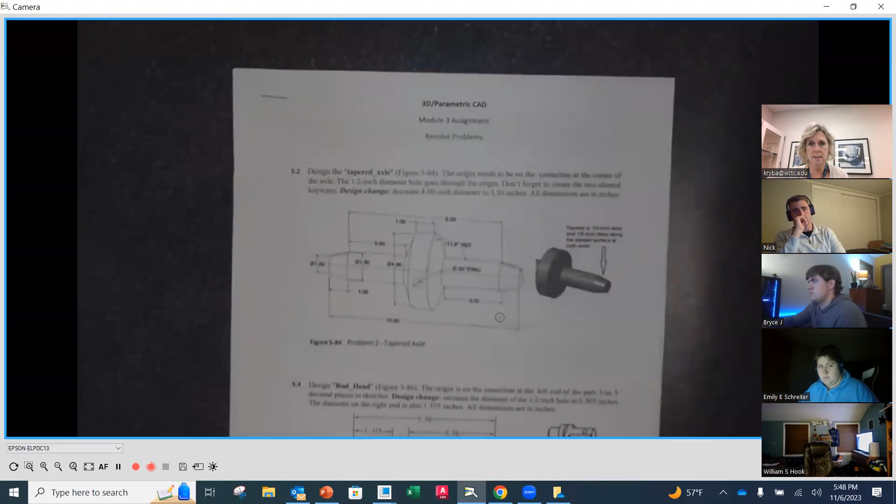I do have it printed out and I'm going to be putting it underneath, but you'll notice that each one of our models is worth 10 points like it normally is. And then you're going to be submitting the screenshots again, like you normally have been. So let's take a peek underneath and look at the items that we have assigned here.

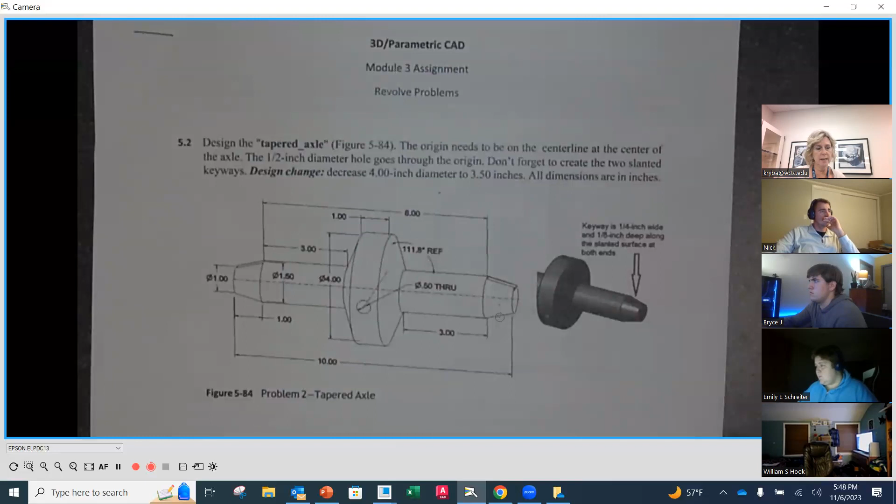So the first problem that we have here is called the tapered axle. You're going to notice the center line going through here. In this case, they want you to put the origin at the center line of this axle. So what that means is down the middle right here is where that front plane is going to be.

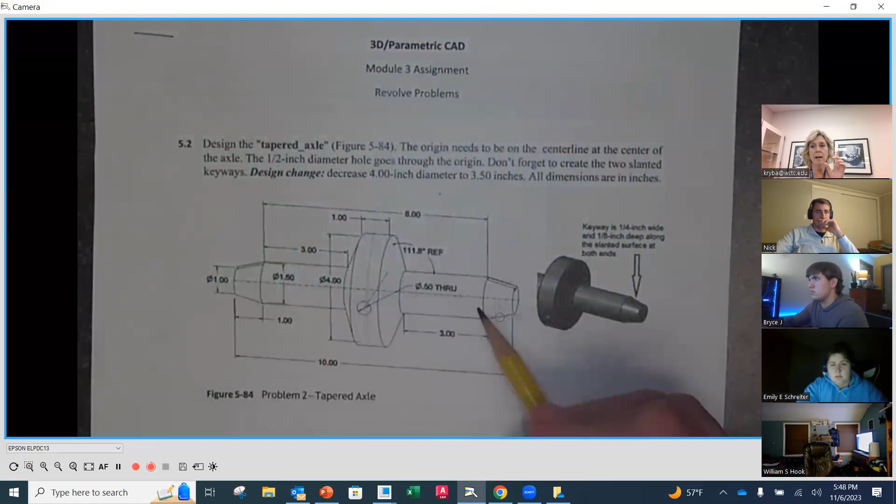So to create this, number 1, you're going to do a revolve. You're going to go in on the revolve. You're going to create your datum center line first and foremost. Then what you're going to do is you're going to look down here and you're going to create half of this on one side as a closed loop.

Then you are going to mirror that side in the sketch. You're still in the sketch. You're going to mirror it to the other side and get rid of the line that's here, because otherwise it'll have that over itself. You have to get rid of those 2 lines so that it makes it all one piece that is now a mirror image and evenly distributed on both sides of that center plane.

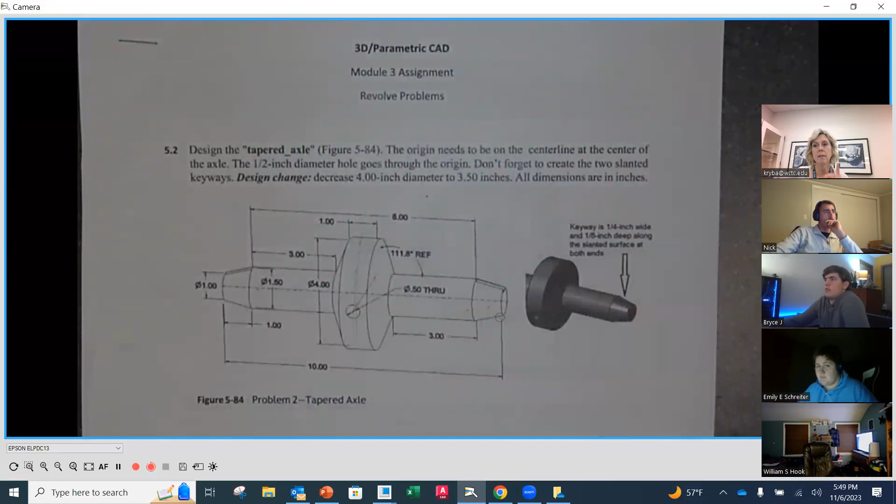Once you have that mirrored, now you can do the revolve. Then there are 2 more features here. There is a little keyway on the end here.

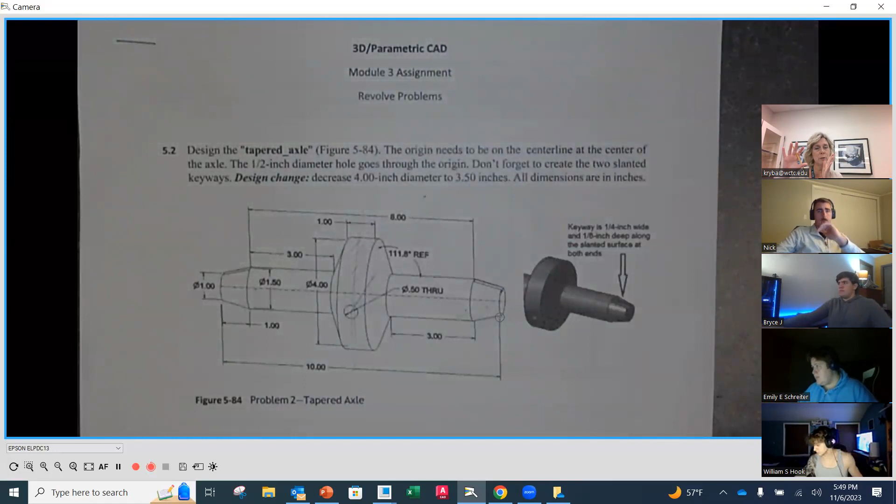And that keyway, you're going to actually put in on the front plane. The front plane is still going to go through here, along here. And then you're going to do a symmetrical extrude. This one's a little challenging, so after we do our overview, I'm probably going to do a demo on that one, so that you kind of understand it, because this one has multiple parts.

And then the last part is going to be putting the hole in. Now, something on the keyway I want to let you know, because it seems like it just depends on how Creo feels.

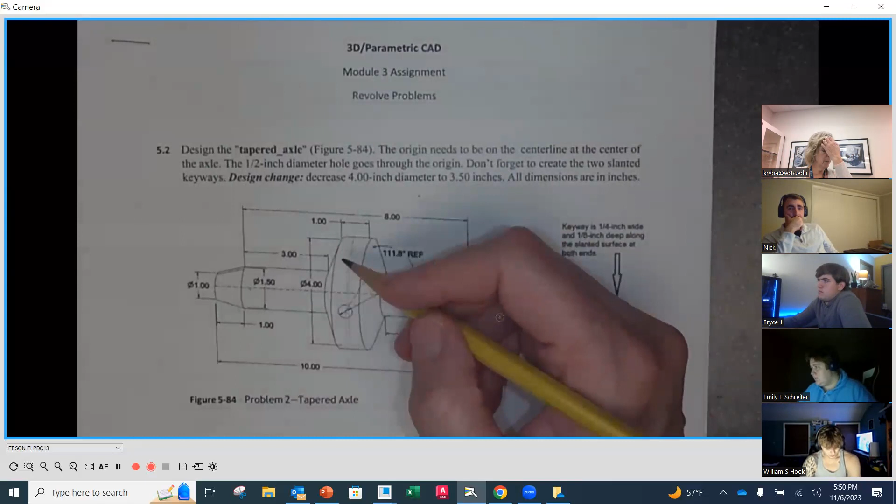The first time I did this, the first practice that I did, it mirrored fine over the right plane. But then the second time I did it right before class today, just to get fresh and practice, it didn't want to do the mirror. So then I had to actually do the very same thing on the other side. So however you have to get it in, it's fine. The mirror may or may not work. I'm not exactly sure what I did differently, but there must have been something.

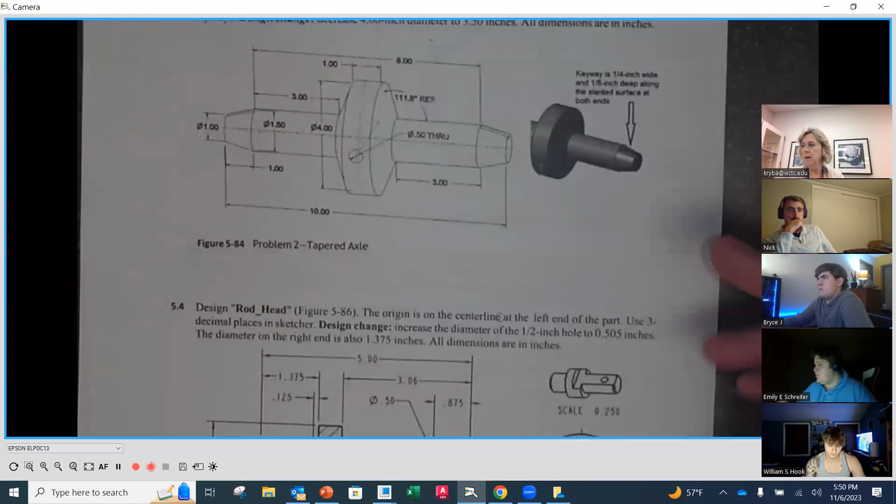Then the next models that we have here, same thing. There is going to be the opportunity to do the revolve on that cross section, but then there's probably going to be some cutaways that you have to do. So for instance, you would create this first as an actual revolved part, but then you would do an extrude, cut, or remove material in order to take this part away.

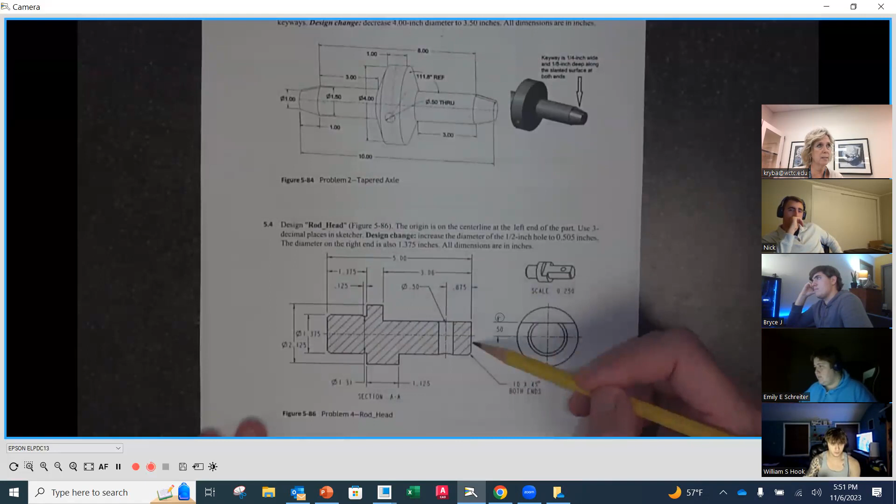So what you would do is you would create this profile underneath, revolve at 360 degrees, but then take material away through the extrude function to get the slice on the top. Does that make sense to everybody? Yes.

Correct. Revolve is only going to be adding an even cross section around 360 degrees. It's still an efficient way to do it because you can still get that initial profile in there, but then you're just going to have to do an extra cut on that extrude function.

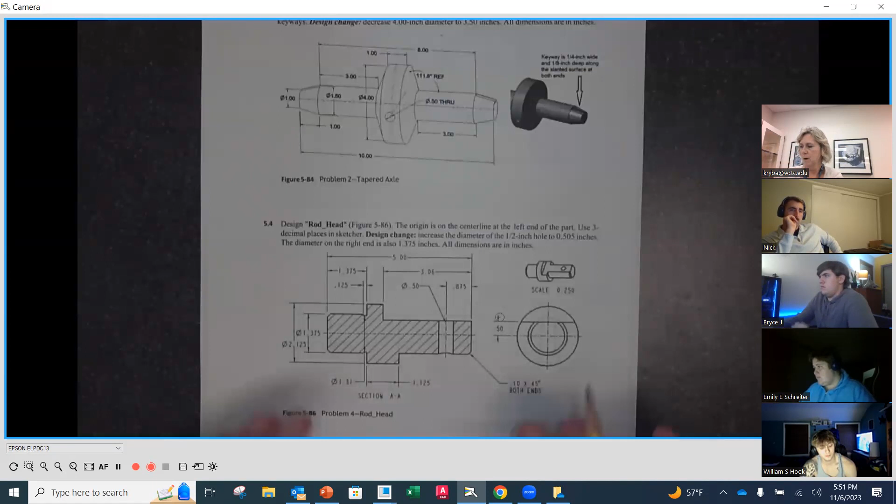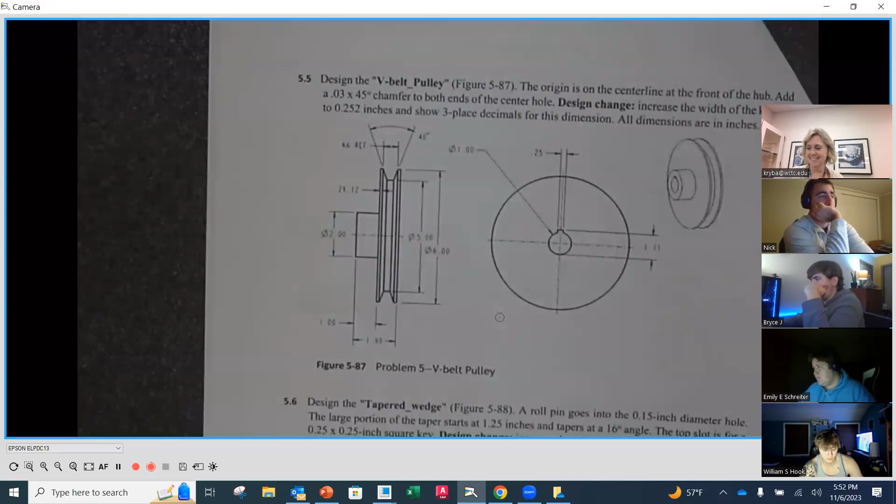Okay, so that's that one. The next one we have is a V-belt pulley. Here's our center line. You're going to want to draw the very top here, and then in the middle there is a bore out of the outside, but additionally there is a keyway. So you would put this in as a circle the first time through, and then you would do an extrude from one end, add that rectangle, and then cut through the entire length.

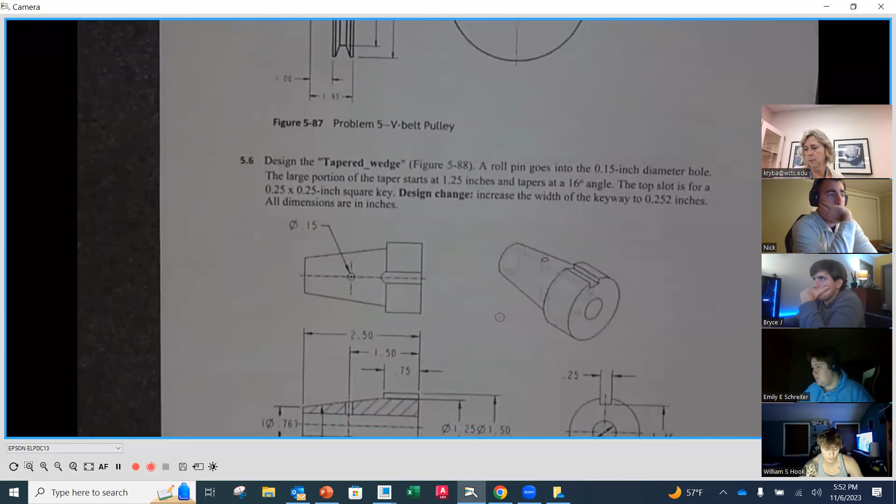The next one we have here is the tapered wedge. You'll notice again, down that center line, the profile going all the way around. Then there's going to be a little keyway on the top here to take away, and also there's going to be a pinhole at that location. So again, the base is a revolve, but then there's a couple other features after the fact.

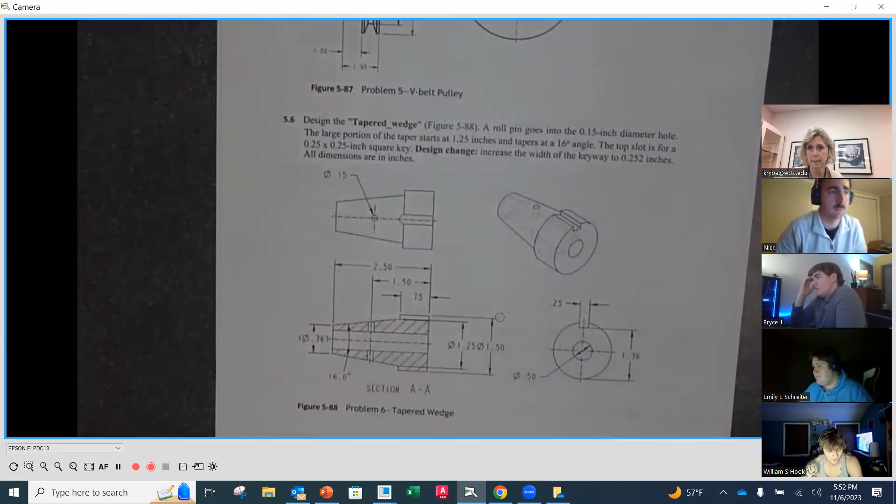Okay, and then there's two more. The next one we have here is a clutch cone. Here you'll notice the profile as well. This one is going to be a single revolve, and then there aren't any other features on this one, but there's a little bit more construction on the revolve.

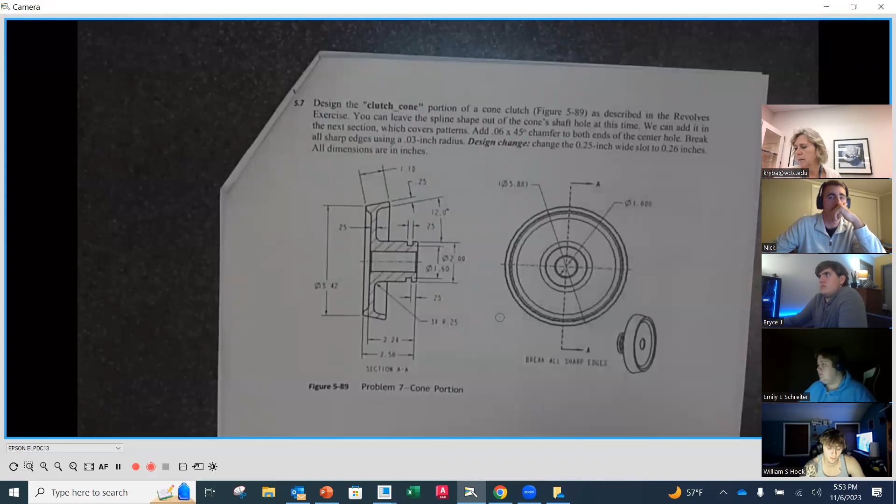Oh, I take that back. There are two chamfers on either end. You would add those as separate features at the feature level, not as part of the revolve. So there are those two extras. I think it wants you to add radius on all the sharp edges too. Oh right, it does say that. Yep, 32nd of an inch. Yep, thank you, you're right.

That would be an extra function as well, and I would do that at the feature level. Do it as a round, not a fillet in the sketch, because it's just the better place to do it. Thank you for reminding me, David.

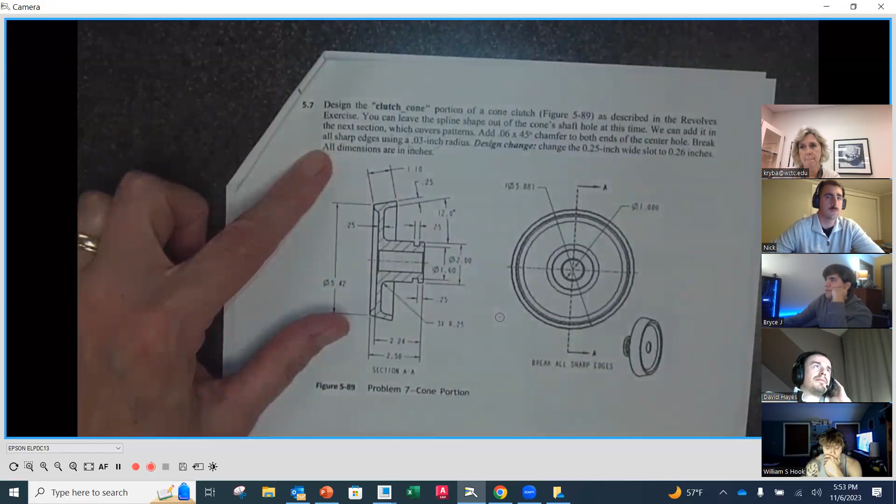I'm looking up now because your voices are coming through the speakers in here rather than my computer, so I know you're here, not there.

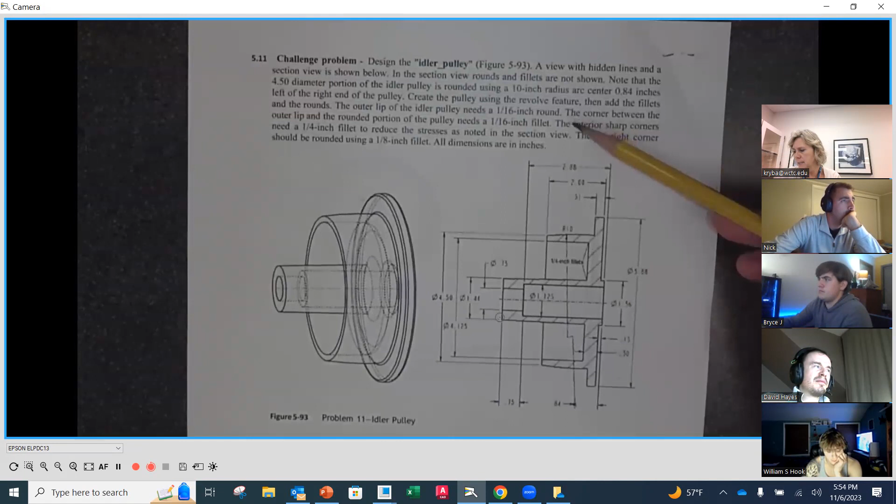All right, so there's that one. And then the very last one is going to be what they call the challenge problem. So I don't want that to make you think otherwise, but this one has a little bit more involved in the sketch itself. Make sure that you read - there's some 16th of an inch rounds that they have here and fillets, so pay attention to that. But overall, this one's a good problem as well.

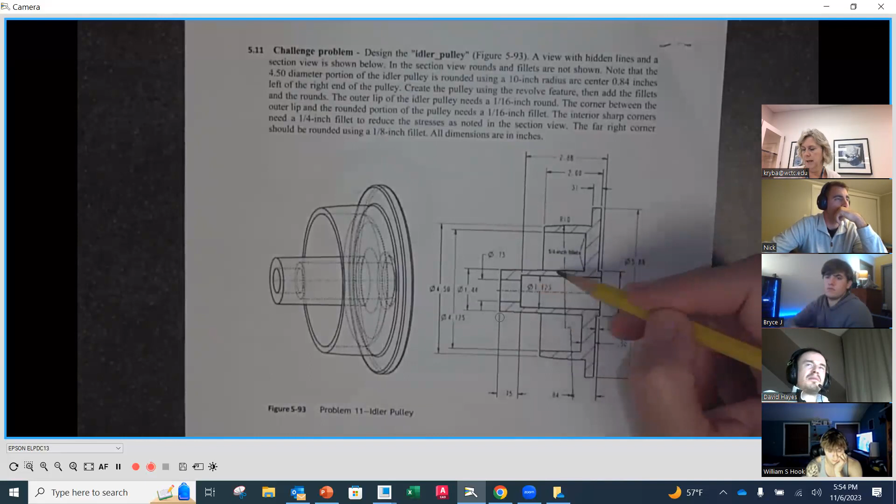There is a taper here from this diameter, it goes all the way down to 1.56 on this side, 1.44 on this side. So what I did when I created it, I actually created it as a tube to start off with, and then I added these other portions by trimming away the sections I didn't need. I did do it all in one single revolve, but to get this in line, I created that line in the sketch as one line, and then I added these and trimmed away that section in the middle.